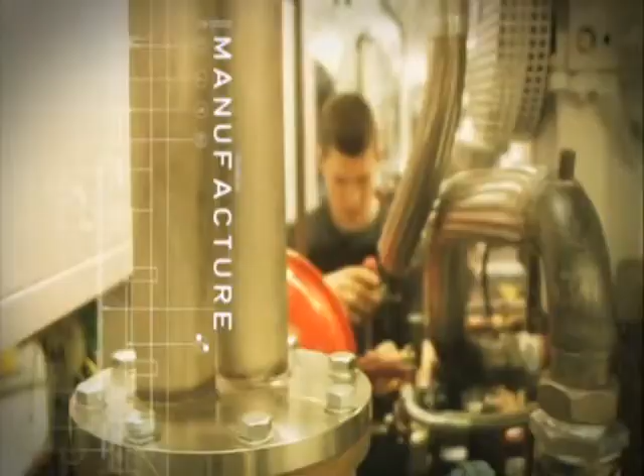Do you ever stop to think about the future? Do you wonder how you'll reduce your energy bills? Do you think about how you'll reduce your carbon dioxide emissions? Do you think about climate change and its effects on future generations?

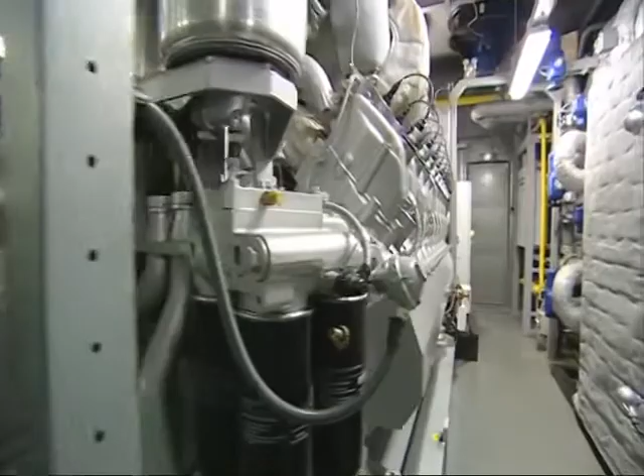With ever-increasing demands for energy and escalating costs to match, the need for sustainable, clean and efficient energy sources is essential, not only to ensure the future of the planet, but also to manage future energy requirements. One such energy source is cogeneration, which creates both electricity and heat in a single process. As this technology is located at the point of use, it is an extremely efficient, environmentally friendly and cost-effective way of supplying energy for a wide range of users.

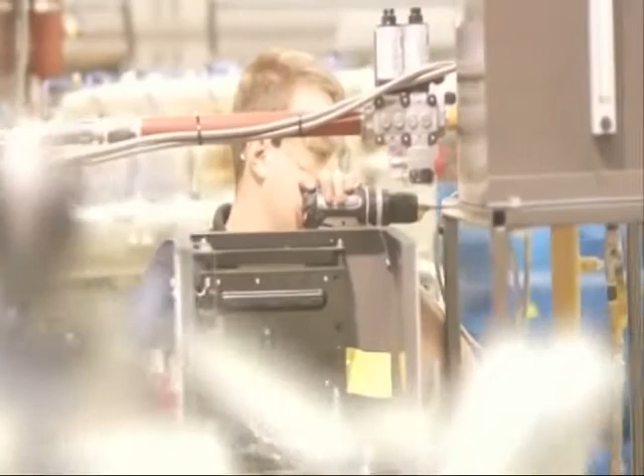ENER-G is the market leader in the provision of cogeneration systems, with experience dating back to 1984. We have installed a wide range of systems, from 4 kilowatts up to 10 megawatts worldwide. Our unique combination of experience, in-house technology and services means we are a single source for the design, supply and operation of cogeneration systems.

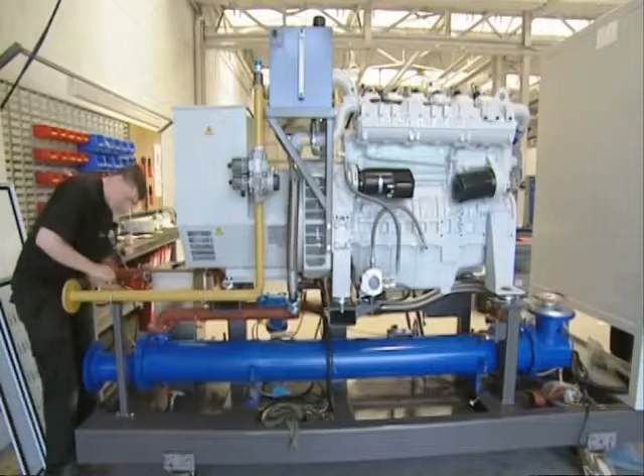ENER-G is also able to offer flexible project funding options that often mean no initial capital outlay and immediate cost savings. From its manufacturing base here in Manchester, the ENER-G Group provide CHP product for use across Europe in a wide range of applications, from leisure centres to hotels, hospitals and industrial sites.

The manufacturing business exports CHP into a number of countries across Europe, including Holland, Italy, Spain, Poland and Hungary, and through its cogen partners into Ireland and Canada. In the UK, we operate and maintain some 500 CHP systems in the field. Many of these units have been supplied to our customers under our discount energy purchase scheme. Under this arrangement, we sell the electricity generated by the equipment, and there is no capital outlay by the customer.

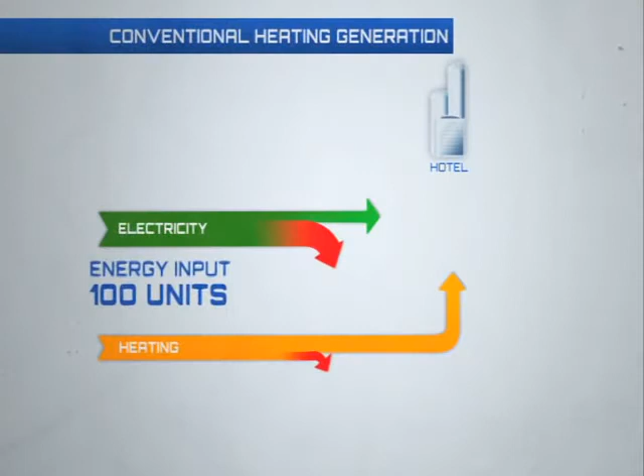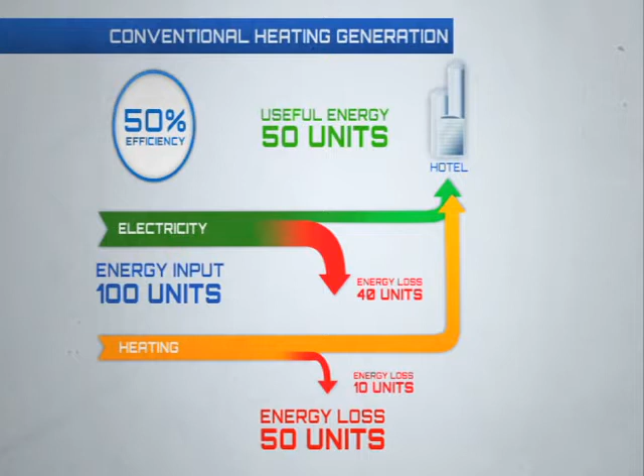Conventional energy generation, where electricity and heat are taken from different sources, results in an efficiency of around 50%, due mainly to transmission losses. By utilising the heat created during the production of electricity, the efficiency of a cogeneration plant can reach 80% or more.

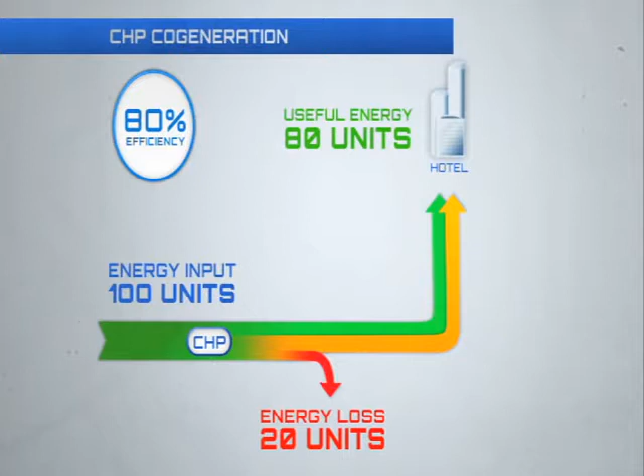Cogeneration therefore offers energy savings of up to 30% when compared to the supply of electricity and heat from conventional power stations and boilers.

But it doesn't stop there. The environmental benefits of cogeneration are significant. Lower CO2 emissions help towards carbon reduction commitment, and the system can minimise the impact of carbon taxes.

As a general rule, a 200 kilowatt CHP would save our customer about £70,000 per annum in energy cost savings and 400 tonnes of carbon dioxide emissions, with a 3-year payback on the investment.

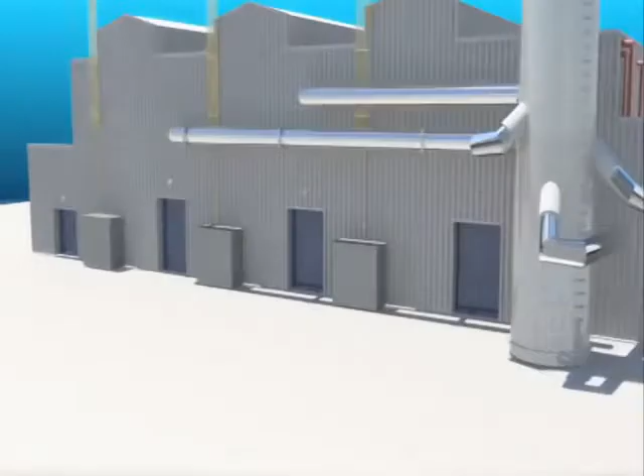The engine generator and heat recovery system are contained within a ventilated acoustic housing.

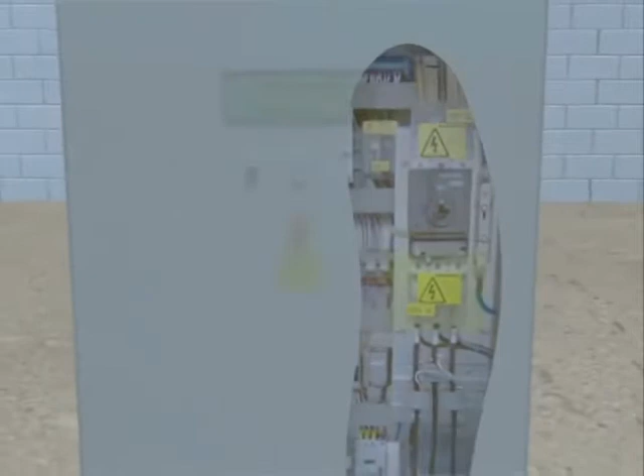Natural gas, biogas or liquid biofuel is mixed with combustion air, which then enters the engine and is ignited by a spark from the ignition system. This combustion produces power to generate high-value electricity in the generator.

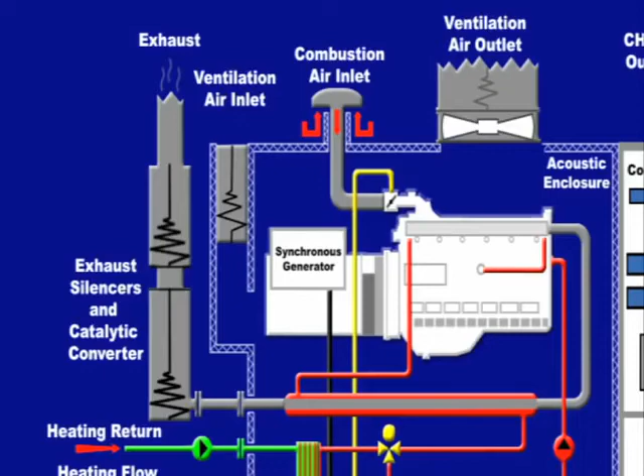The electricity is metered as it is fed from the CHP, passing into the client's electrical network or the local electricity grid.

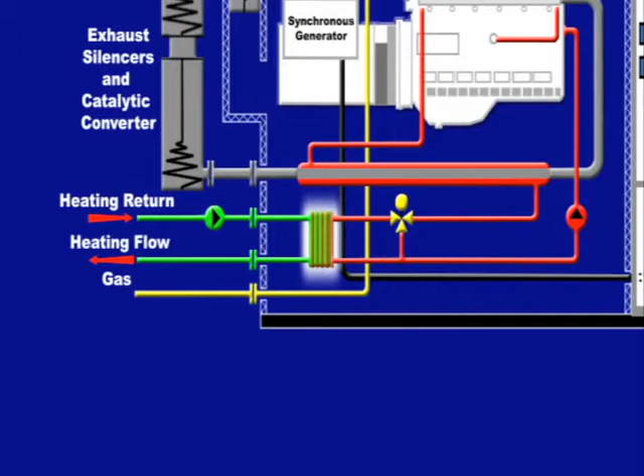Heat is recovered by passing water around the engine, also ensuring the engine is cooled. This water then flows through an exhaust gas heat exchanger where more heat is recovered. The heat is metered as it is transferred to the customer for heating and hot water purposes through a plate heat exchanger. Capturing this energy brings the total efficiency of the system to more than 80%.

As a result of burning clean gaseous fuels, the exhaust gas is inherently low in pollutants, but these can be reduced still further with a catalyst.

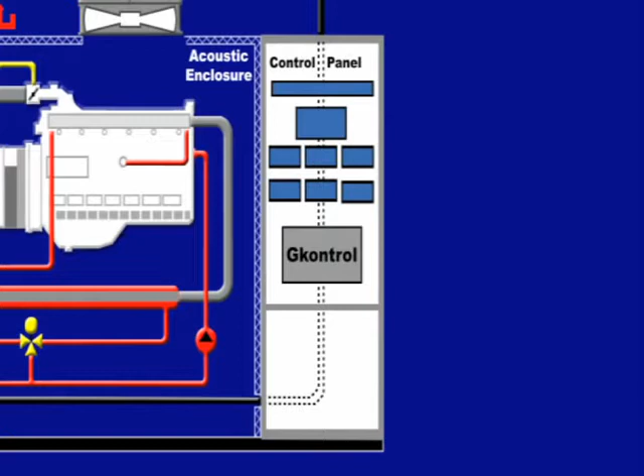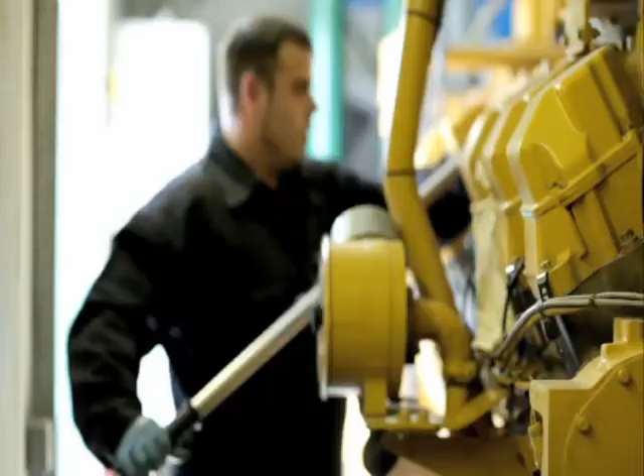The CHP contains a patented Gkontrol system which monitors, protects and controls the equipment to optimise its operation. Remote access to Gkontrol means that the equipment can be remotely monitored and optimised. Should a fault develop on the equipment, engineers are notified immediately and suitable corrective action can be taken.

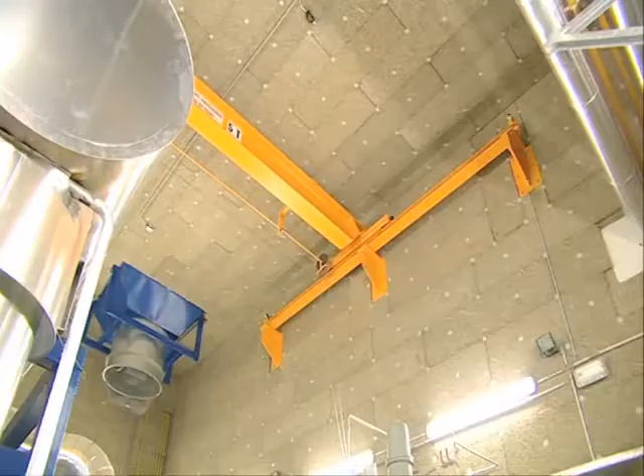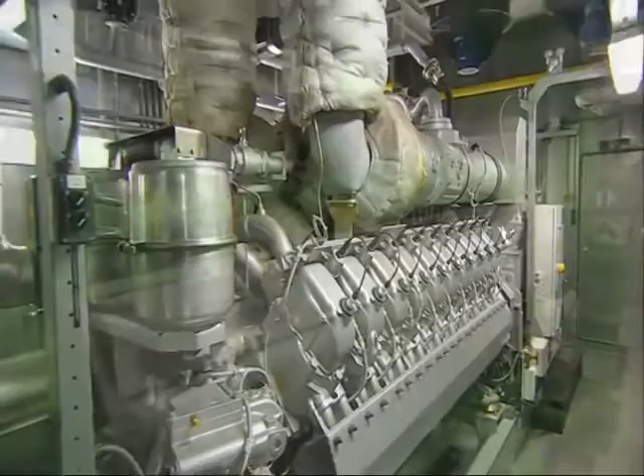Our cogeneration systems are available in a wide range of sizes to suit all requirements, from 4 kilowatt units right up to large 10 megawatt systems. These units can be powered by natural gas, biogas, liquid biofuel or propane.

ENER-G has a range of standard packaged CHP units that contain all engine generator, heat recovery and controls within a low noise enclosure.

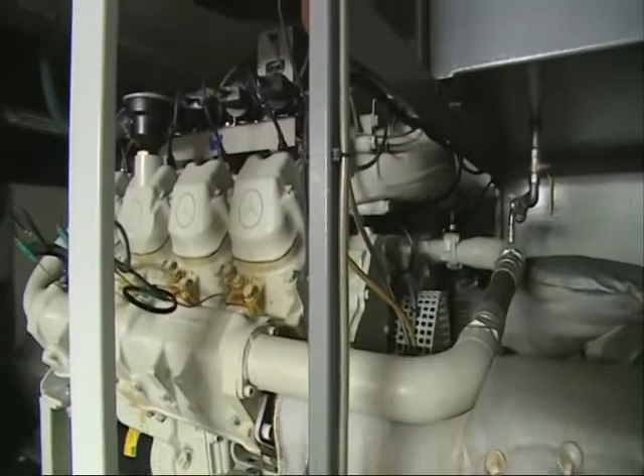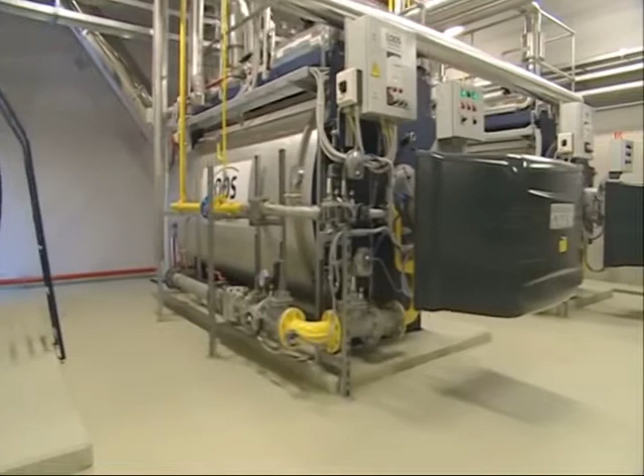Where customers have a specific requirement, ENER-G has the capability to design bespoke solutions. Heat can be provided in the form of hot water, steam, or converted into chilled water for cooling purposes using trigeneration.

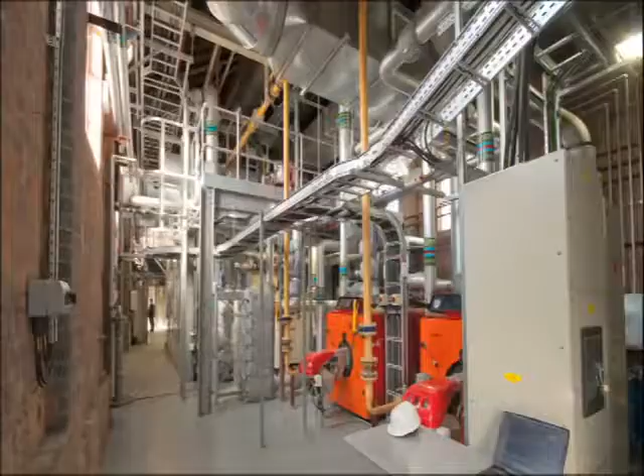Projects often include complementary technologies from within the ENER-G group, such as heat pumps, building energy management systems, and energy-efficient lighting. We are able to offer a comprehensive range of turnkey energy solutions for large industrial, commercial and public sector applications. In these circumstances, we may include the provision of a dedicated energy centre, together with all necessary infrastructure enhancements needed to fully optimise the energy requirements of a site.

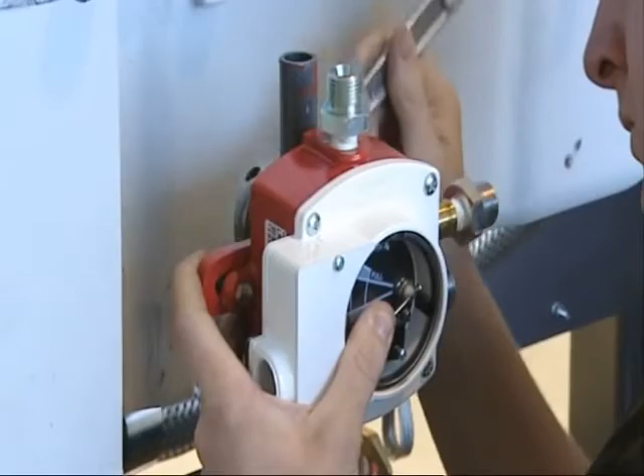These projects can be funded by ENER-G, giving customers the freedom to deploy capital on core activities.

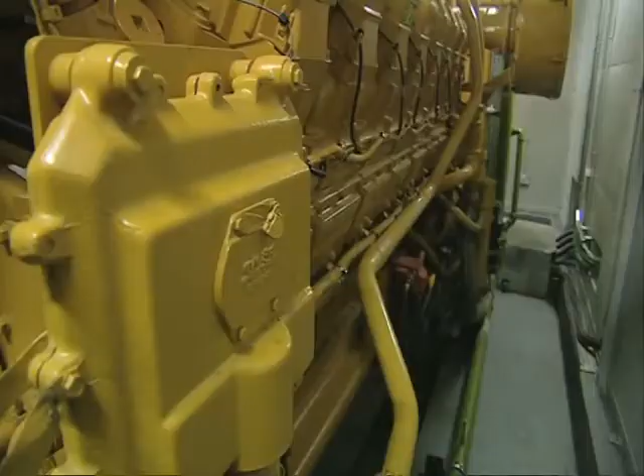This is the Holywell Park area of Loughborough University, and we've installed a 1 megawatt CHP unit in a gas-fired reciprocating engine. This provides 1 megawatt of electricity into the campus and also 1.2 megawatts of heat that we can use around the site for both heating in the winter and absorption cooling in the summer.

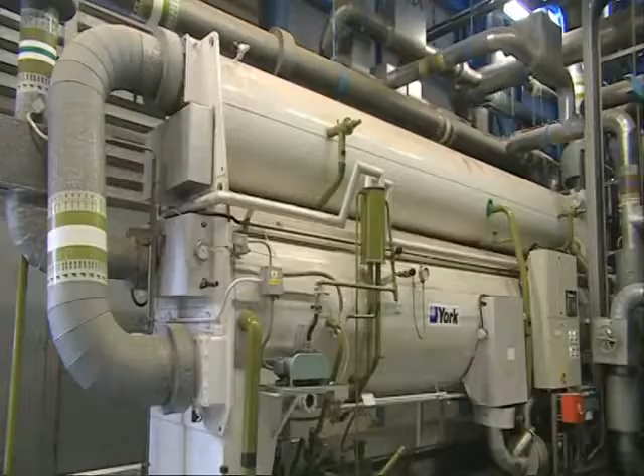So it provides a very good solution for heating and cooling of the building in quite an effective manner. It's performed very well. Since it was commissioned in February 2009, we've had very good reliability, over 95% availability.

That's resulted in some very good financial and carbon savings for the university. In the first year of operation, we've got about £150,000 worth of financial savings and also 1,800 tonnes of CO2, which is really key in the university's aim to reduce its carbon emissions and environmental impacts.

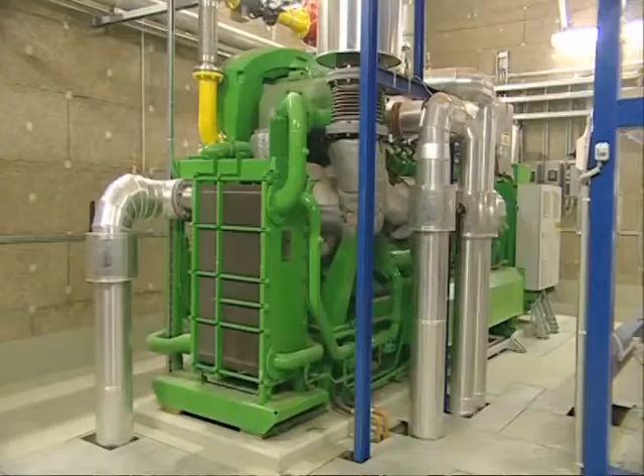We started the CHP wastewater plant in Budapest in 2007. The design work and installation work were done, and we installed 3 cogeneration units, each one 1.4 megawatt. We also installed 3 boilers, with the power of 2.5 megawatt in each.

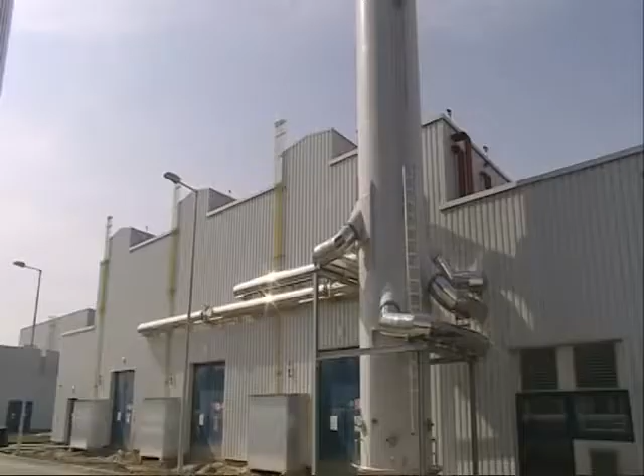We use the biogas on the engines. Normally the 2 engines run with biogas. If we have more biogas, we can also burn it on the boilers. Regularly the boilers run with natural gas, depending on the power and the heat demand inside.

In winter in Hungary there are minus 15 degrees, so we need the natural gas also to produce enough heat for the site. Normally we use the electricity at the site, it's 3 megawatt. The total demand from the site is about 6 megawatt, so the engines could produce half of the electricity demand.

It's a 21st century technology, and it's a huge benefit for the town, for Budapest. Before the CHP wastewater treatment plant, only 50% of the total wastewater was cleaned in Budapest. Now this number is 95%. So it's a very green technology, and with the cogeneration power, it's very efficient and very environment friendly.

So here at the Village Whiston, we've got a 4,000 member health and fitness club, bars, restaurants, a conference centre and a 63-bedroom hotel. We use a lot of power, especially in the leisure club part of the business.

We wanted to buy cheap gas and turn that into electricity and save some money. We've been considering CHP for some time now, and Liverpool just seemed to fit all the criteria the company wanted to use to test the system out. So we were chosen to be the first one for that reason.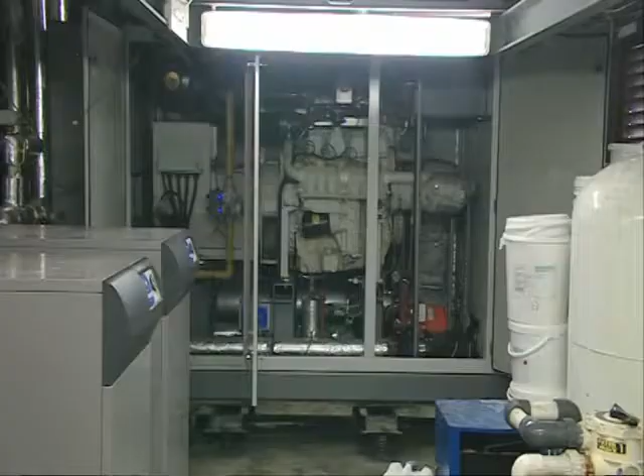The thing has gone according to plan. It looks as though we're going to achieve the savings that we set out to do in the first place, which are in the region of about 10% of our total energy costs, so we'd be really pleased with that. If we're successful here, then we've got another 23 hotel and leisure clubs to do, so we'll just roll it out straight away. There's no reason not to.

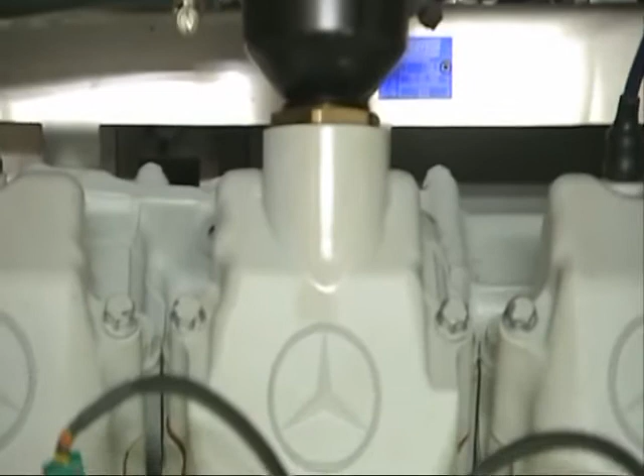It's performed flawlessly, to be honest. It's been a very simple transition from one to the other. In fact, we've not really noticed that it's been happening.

The main benefit of the CHP system for us is that we look to save around about 10% of our total energy costs for the hotel. There's then a climate change levy saving for the hotel of around about £7,000, and then there's a carbon reduction saving that we'd look to make in the future of between about £3,000 and £4,000 per annum. It's a considerable saving on a business's energy cost like ours.

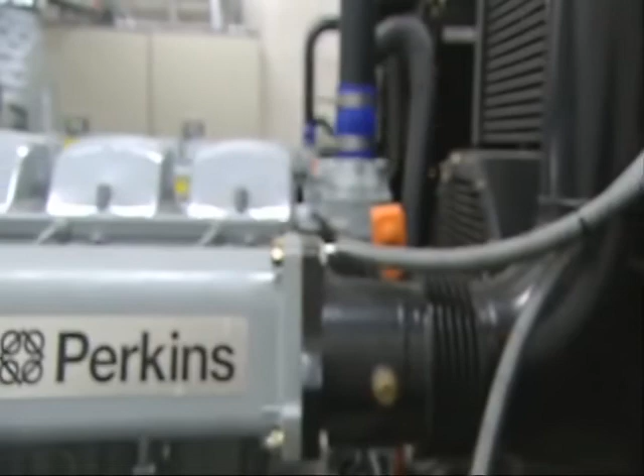The computer department at Delft University in Holland wanted the security of a backup power supply in case the main supply should fail. Energy installed 2 standby generator sets with an electric output power of 800 kilowatts each. If the main supply should fail, the power immediately switches over to a battery backup whilst the engines start up. Once at speed, the supply will switch to the generator feed.

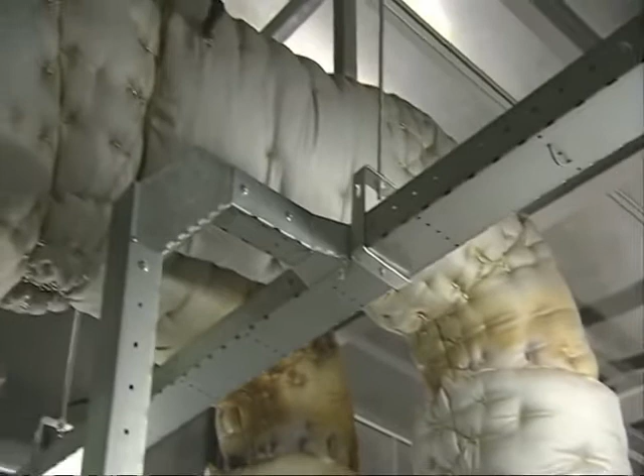Here at this cucumber greenhouse in Kampen, North Holland, one CHP system supplies all the electrical power required at the site with an output of 1,960 kilowatts. This unit not only supplies electrical power and hot water, but also has the added bonus of purified exhaust gases being used to cultivate the growth of the cucumbers.

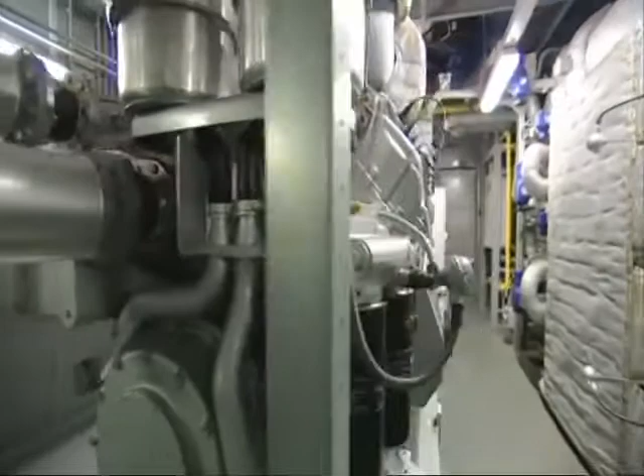At Energy, we combine our unique experience with in-house technology and services to provide a wide range of cogeneration solutions. These solutions provide an environmentally friendly and cost-effective way of ensuring you meet your future energy requirements.